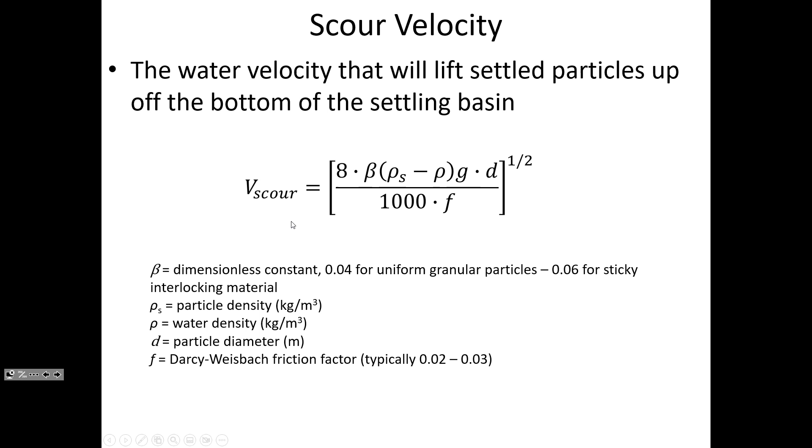At the bottom, the flights are scraping against the bottom of the tank. And so the question that we want to know is, how quickly should we run this chain-driven series of flights? If this is scraping across the bottom, how fast should it be going? And if we know the velocity of these flights, then what kind of motor should we get? How many RPMs? What should be the gear diameter? The example that I put together for today's class, I wanted it to be where we were solving for a rotational rate on the motor, but I ran out of time, so we're just going to calculate the velocity of the flight, and then gear diameters and sprocket lengths and so on we'll maybe have to leave for another day.

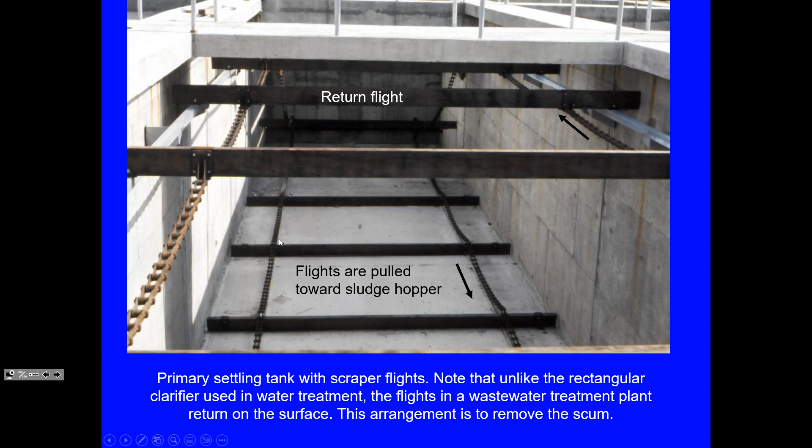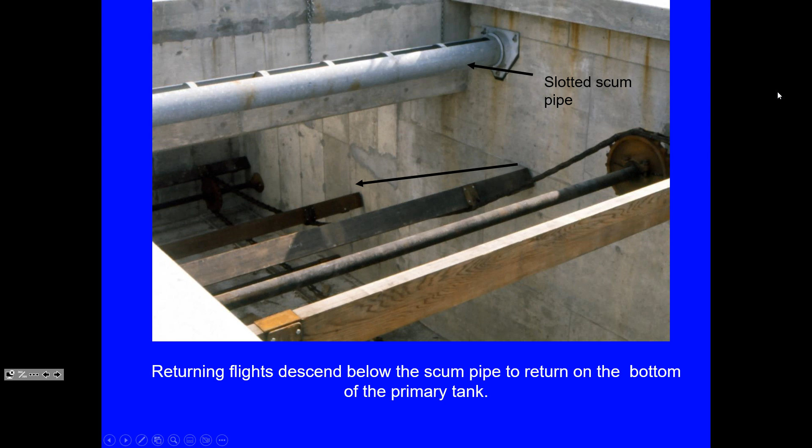So basically what we want to know is how quickly can these flights be dragged across the bottom of the tank? Because if they're moved too fast, think about these particles settling downward. If this is moving really fast, then it's sending a bunch of swirls and turbulence into the settling basin. So at the top, the flights are pushing the oily scum towards a trough, and the water can flow over the top into that trough, or occasionally they'll tilt the trough and kind of squeegee the layer off the top into it. And you can get a sense for that here.

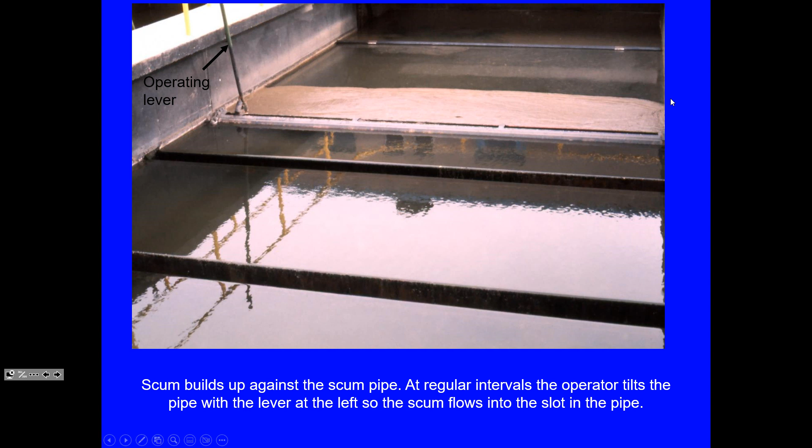There's these overflow pipes, and you can see that the scum layer has accumulated here, and they can tilt the water. But the launders, where the effluent is actually going out of the clarifier, are on the other side of this concrete walkway. And the concrete walkway impinges down into the water because this is meant to be a barrier so that none of the scum will get into the launders. And so all of the scum should be intercepted by this slotted pipe drain.

You can see that there's some foam at the top, and that used to be a real issue at wastewater treatment plants. The detergents that were used through the 80s and the 70s and before that had a lot of phosphates in them. When there was a lot of phosphates in detergents, it worked great for getting people's clothes and dishes clean, but it caused a lot of unpleasant and difficult foaming issues at treatment plants. And so luckily, phosphates have largely been banned in detergents, not just because of how it interferes with wastewater treatment plants, but also because it contributed to algal blooms in the Gulf of Mexico.

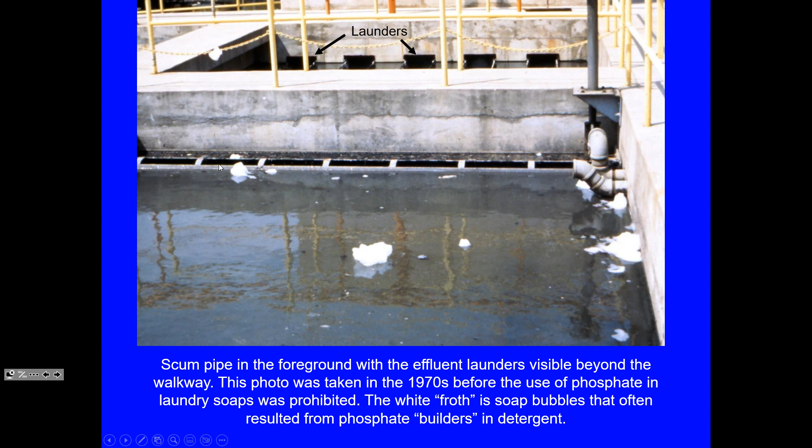You've maybe heard of red tide before, which is when they have these big sections of the ocean that algae bloom and fish get killed and they start to decay, and it's because there's excess nutrients in wastewater that gets discharged into the Gulf of Mexico from the Mississippi River. So by limiting the amount of phosphate that gets into water, they've kind of reduced a lot of environmental problems, including foaming of wastewater at treatment plants.

So here you can see the water going into the launders. It's relatively clear in appearance. The turbidity is less than it was when the wastewater came into the primary clarifier, but there's a little bit of foaming here, the froth that came from the phosphate that used to be in water.

There are countries where phosphate isn't regulated as carefully as it is in the United States, and so if you do end up doing a wastewater treatment plant for the State Department overseas, you might see some foam in a treatment plant. Sometimes you'll see foam in like hot tubs.

It was always a gag when I was in college. There was a hot tub at our apartment complex, and people would always put soap in it, and they would get like 10 feet of foam. Kind of funny.

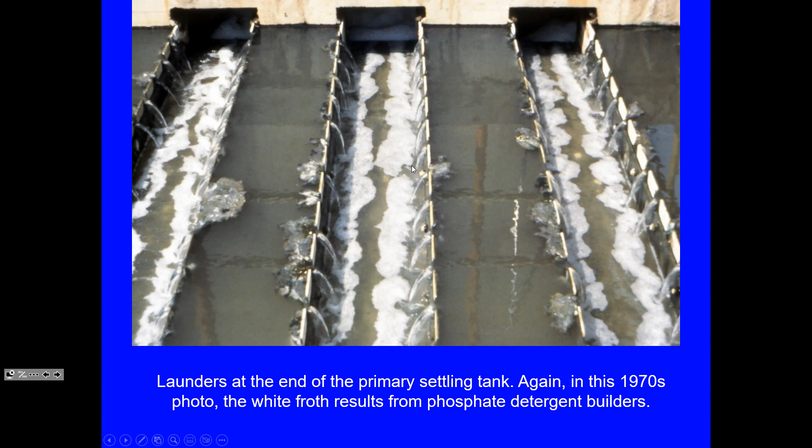But we want to know how quickly should those flights move. And the scour velocity, one pretty easy assumption for us to make is that as quickly as the flight is moving, the water that's in contact with the flight has that same velocity. So if we've got a flight moving at, let's just say, 10 centimeters per second, then that could cause the water to have a 10 centimeter per second velocity as well. And would that dislodge the particles from the bottom of the tank and send them upwards? Well, that's what we're going to find out here.

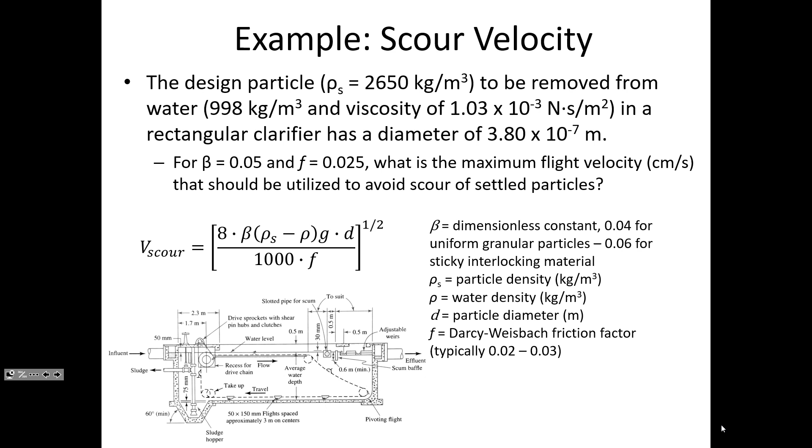All right, so we can move these flights at about 1 centimeter per second, and the particles won't be disturbed. I guess that's reassuring, because that seems like a relatively achievable velocity. If we were saying that it had to move at 0.1 millimeter per hour or something, it doesn't seem like we'd be able to control that, much less make it workable in a real-world situation. But 1 centimeter per second, with the right gears and the right motor, I'm sure that we'd be able to make that happen.

And this is a relatively small diameter particle too. So if it was the particle on the exam, where it was like 1.2 times 10 to the minus fifth meters, then we could have an even higher scour velocity that could be tolerated. Now that doesn't mean that you have to move the flights at that velocity. It's just the maximum velocity you could move it without disturbing it. So anything this or lower, and we won't be sending our settled sludge back up into the water.

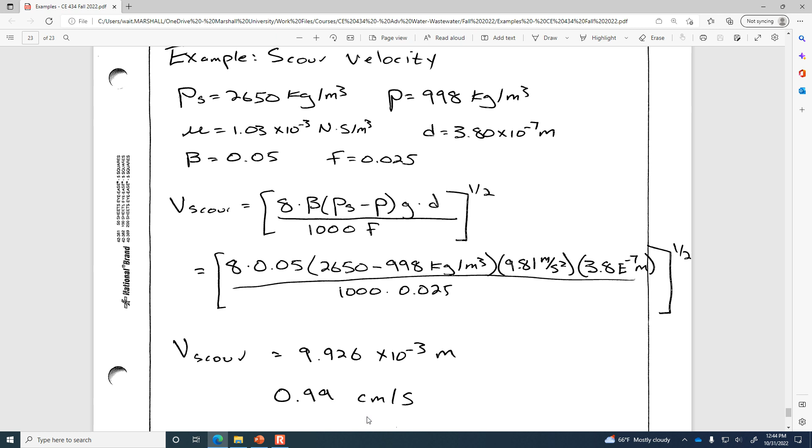All right. Well, that's all I have for you today, unless there are any questions from the example.

Maybe you saw my email that we've got some leftover food from the barbecue on Saturday. So if you want some Buddy's barbecue, it's over in the other building in room 109. We've got coleslaw, potato salad, chicken, buns, cookies. So help yourself.